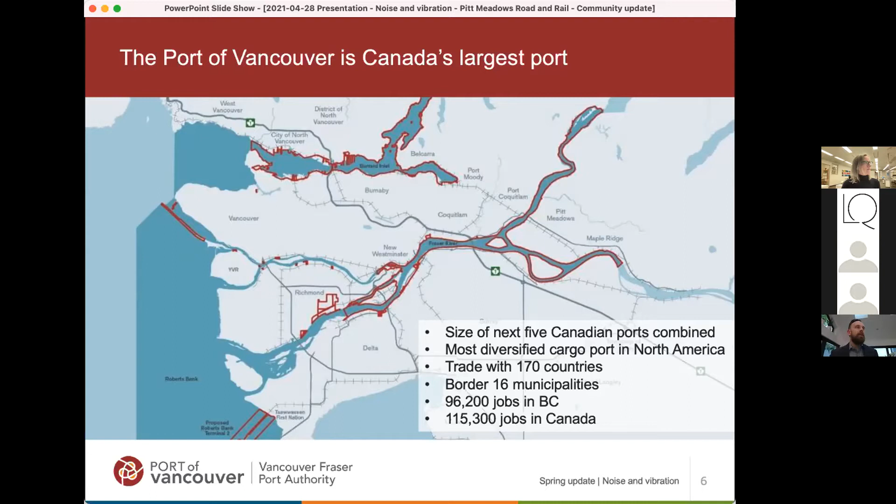Building off that background of who we are and what we oversee, I'd like to transition into what we see for the future. The Port Authority, in consultation with regional partners through the Gateway Transportation Collaboration Forum, has analysed historic trade movement data and trends and engaged with industry experts to assess likely national and global market conditions in the years ahead. With this information, we have identified a forecast of approximately 50% growth in trade volumes by 2030, compared to volumes measured in 2015, as shown in the image on this slide.

This 50% growth in trade corresponds to approximately the same year-on-year growth observed in the last 5 to 10 years. While subject to change due to items outside our control, the COVID pandemic being a good example, we are still confident in this growth projection. But keep in mind growth could be a bit slower, with these volumes reached a few years later than 2030, or it could be faster and reached before 2030.

Next slide, thanks. When you combine this trade growth with forecast population growth in the region, it highlights the critical importance of investing in infrastructure to ensure we can safely and efficiently manage this growth, to both meet our trade objectives and manage the impacts on local communities and our surrounding environment.

As an example of our need to build capacity, if we look at container trade for a moment, we know this segment has grown in recent years and continues to grow globally. In Canada, we use containers to export goods like grain and agricultural products, and import using containers for things like consumer goods. Given this, we see that Canada's West Coast ports face a capacity crunch by the mid-2020s.

Based on this forecast growth in trade, we are prioritizing infrastructure investment in Pitt Meadows to help respond to the existing and growing impacts of these trade movements to your community. The Pitt Meadows Road and Rail Improvements Project received funding through the Government of Canada, Canadian Pacific (CP), and the Port Authority to improve safety, efficiency, and capacity to move goods and people through the region and deliver significant national economic benefits and local community benefits.

The Pitt Meadows Road and Rail Improvements Project is made up of 3 connected but discrete components. 2 of these are being led by the Port Authority and are shown in orange: the Harris Road Underpass and the Kennedy Road Overpass. The third component, led by CP, consists of 2 parts and is shown in red: a new siding track as well as an extension of an existing lead track to the Vancouver Intermodal Facility.

Some of you may be wondering, what could happen if the community doesn't support, say, the Harris Road Underpass? Does that mean the rail changes won't happen? I'd like to provide you with some clarity. While the cliche of the whole being greater than the sum of the parts is certainly valid on this project, each component brings merits in its own right.

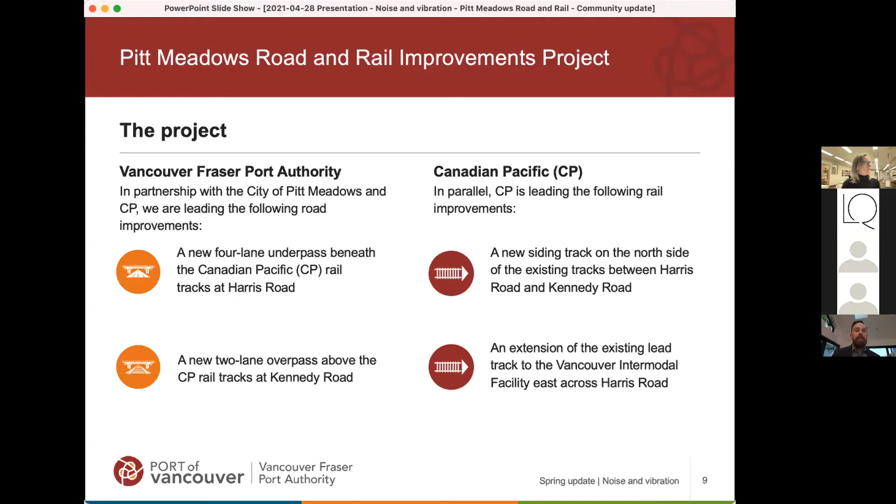Given the forecast significant trade growth, as well as CP's obligations to provide service in support of Canadian businesses and consumers while also operating in a safe and efficient manner, rail infrastructure investment along the Pitt Meadows corridor will likely happen in any future scenario. Given the proposed rail scope is wholly contained within CP's rail corridor, it is the Port Authority's understanding that CP can proceed with all, a portion, or a modified version of their component on their own. But it is also the Port Authority's assessment that the Pitt Meadows Road and Rail Improvements Project represents the most effective way to balance the interests of each partner and support a future which provides meaningful benefits to Canada, CP, and the Pitt Meadows community.

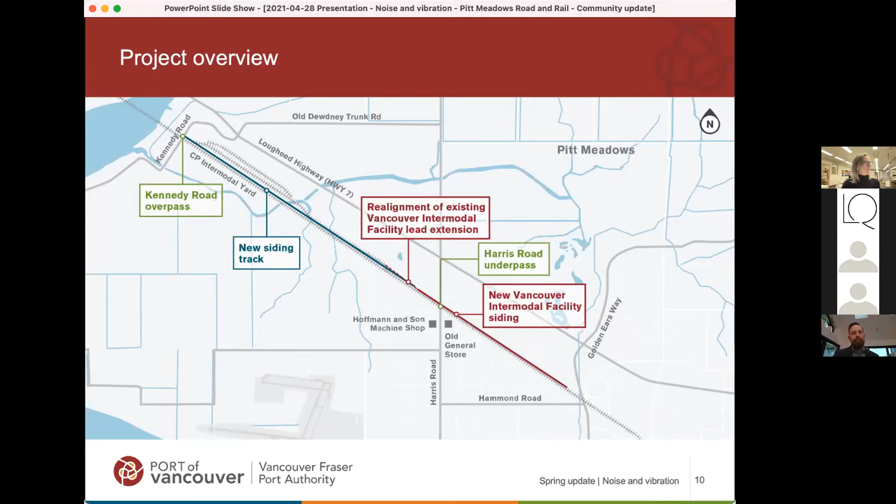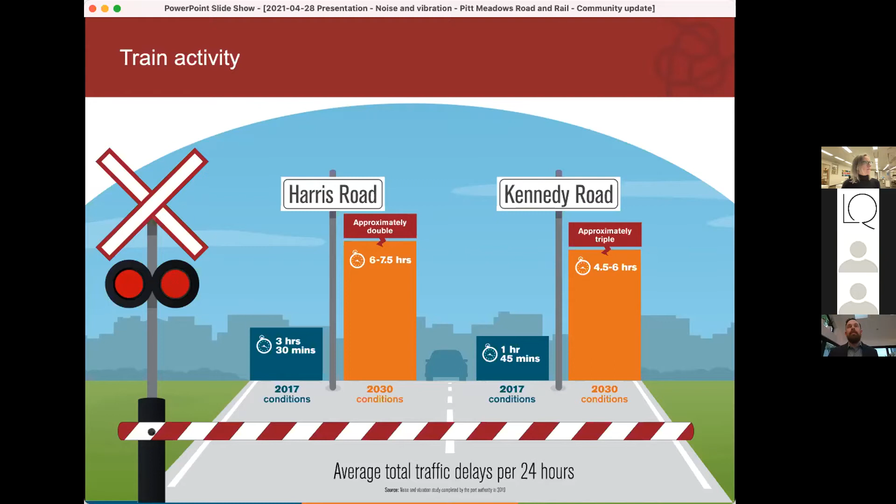This slide hopefully provides you with one of the key benefits to the community that this project is bringing. Based on the forecast growth, one of the reasons why we are prioritizing this project is to help respond to the existing and growing impacts of these trade movements to the Pitt Meadows community. As you can see on this image, the existing delays experienced by commuters at Harris and Kennedy are shown in blue. Our projections, shown in orange, indicate that by 2030, the delays at Harris will be roughly double what they are today and triple what they are today at Kennedy, in a scenario where the project is not constructed. Next slide, thanks.

We also see many more excellent opportunities that this project can bring to the community. That includes improving things like public safety, emergency response times, reliability for commuters, pedestrian and cyclist connections, and public spaces, while also reducing things like congestion and emissions.

My hope is that these last few slides help set some context of who we are as a Port Authority, what the project is, and some of the key benefits we see the project bringing to your community.

So in 2019, the Port Authority retained BKL, an acoustical engineering firm, to undertake a noise and vibration assessment. The assessment measured current levels and modeled future levels with and without the Pitt Meadows Road and Rail Improvements Project. This assessment was completed in line with Health Canada guidelines for noise and guidelines for vibration from the US Federal Transit Administration, which I'll refer to as the US FTA.

While we acknowledge it's currently noisy along the corridor, addressing pre-existing noise impacts caused by rail operations is not a core objective of the project. The focus of our project is to maximize our core objectives of ensuring the safe and efficient movement of people and goods by road and rail while identifying, analyzing, and mitigating impacts where warranted.

This approach is in line with other transportation projects of this scale recently completed and currently underway in the Lower Mainland. The Port Authority will work with CP and the City of Pitt Meadows to explore opportunities to maximize the benefits of the proposed warranted mitigation to address any existing issues where we can. But I want to re-emphasize that this project does not have a core objective of addressing pre-existing noise impacts.

The next couple of slides will give a brief snapshot of the technical lens as to how noise and vibration is measured. I'll flag that I'm about to go into a bit of detail here, but I hope it gives a good introduction to what noise and vibration is for the purposes of what we are looking at for our assessment.

Noise is measured in decibels, shown as dB, but there are sometimes different versions of decibels used. A-weighted decibels, or dBA, is often used when describing sound level recommendations for healthy listening. While the dB scale is based only on sound intensity, the dBA scale is based on intensity as well as how the human ear responds. Because of this, dBA gives us a better idea of how sound could impact your hearing.

Decibels are different from other familiar scales of measurement. While many standard measuring devices, such as rulers, are linear, the decibel scale is logarithmic. This kind of scale better represents how changes in sound intensity actually feel to our ears. For example, think of a sidewalk that is 80 meters long. If you extend the sidewalk by another 10 meters, so 12.5%, this would seem barely noticeable - this is a linear measurement. Using the logarithmic decibel scale, if a sound is 80 decibels and we add another 10 decibels, the sound will be 10 times more intense and will seem about twice as loud to our ears.

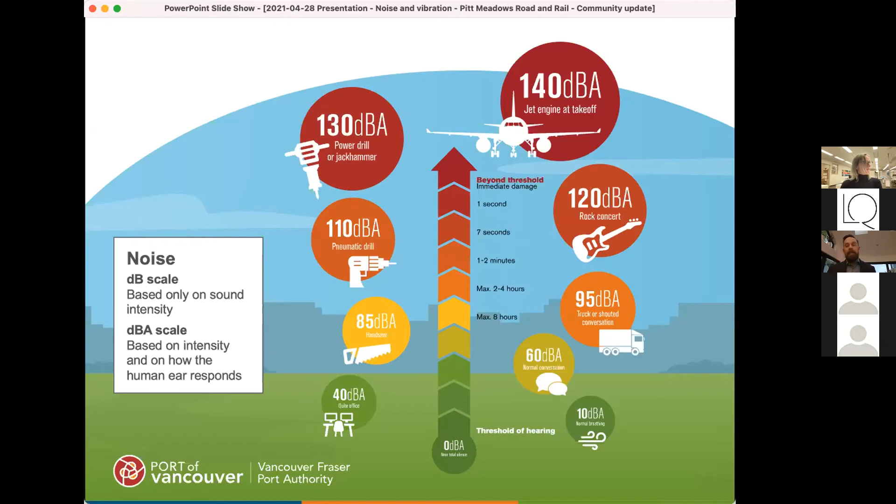The movements may be regular, such as the motion of a pendulum going back and forth, or more random, such as the movement of a tire on a gravel road, which is a little bit more sporadic. So when thinking about health effects of vibration, we measure the overall pressure waves generated by whatever is vibrating - it could be a piece of equipment or a structure. This is also known as vibration energy.

Vibration has two measurable quantities. Firstly, how far the object moves - this is also known as amplitude or intensity. Secondly, how fast the object moves, also known as frequency. This helps to determine its vibrational characteristics.

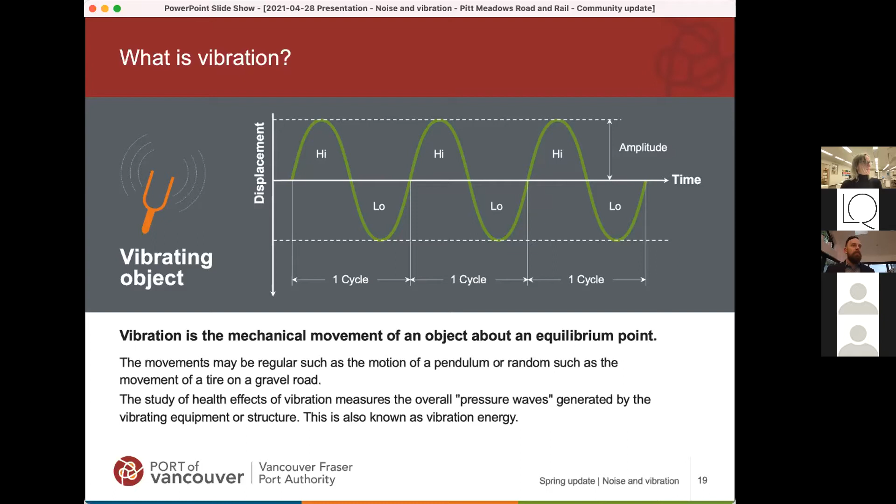I recognize the past couple of slides have been a bit technical in nature, but we have more background information on how we measure noise and vibration in the materials that we have uploaded to our project website.

Building off the background info, I'd now like to dive into the regulations and guidelines used in Canada when looking at noise and vibration on projects. As the lead on the project, the Port Authority's role is to ensure that potential noise and vibration impacts caused by the Pitt Meadows Road and Rail Improvements project are identified and analysed by independent experts, and to apply appropriate mitigation that is reflective of Health Canada's guidelines.

There are two important considerations to be mindful of when considering regulations and guidelines for noise and vibration.

Firstly, the Canadian Transportation Agency, or CTA, sets the regulations for noise and vibration caused by rail operation and also manages complaints and resolutions. Secondly, Health Canada establishes the guidelines and criteria for noise caused by new infrastructure projects, similar to the Pitt Meadows Road and Rail Improvements project. And there are guidelines established by the US FTA as applicable to vibration considerations on new projects.

The next few slides will go into a bit more detail of these regulations and criteria. One thing to note, though, is that we are providing this information for your awareness. If you have any specific queries or further clarification questions relating to these established regulations and guidelines, they are best referred to that particular regulator. We include these links in the materials we have uploaded to our project website.

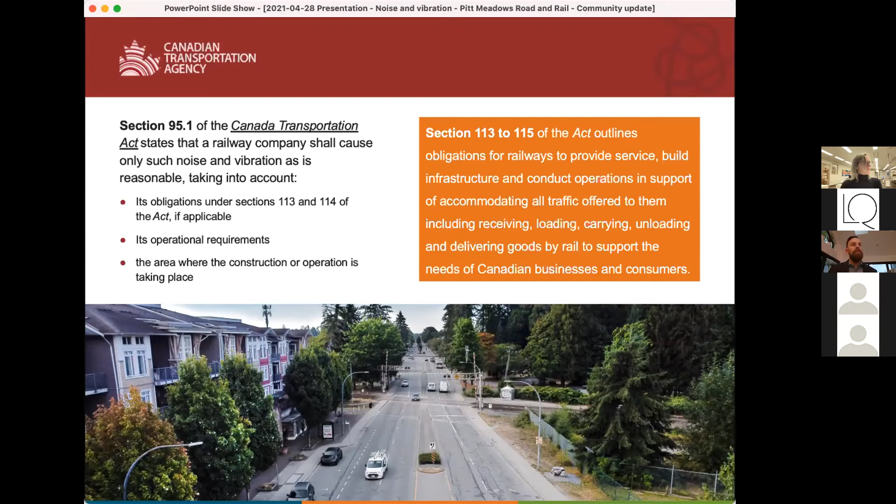This obligation is set by the Canada Transportation Act and requires that railways must provide service, build infrastructure, and conduct operations in support of accommodating and delivering goods by rail to support the needs as requested of Canadian businesses and consumers.

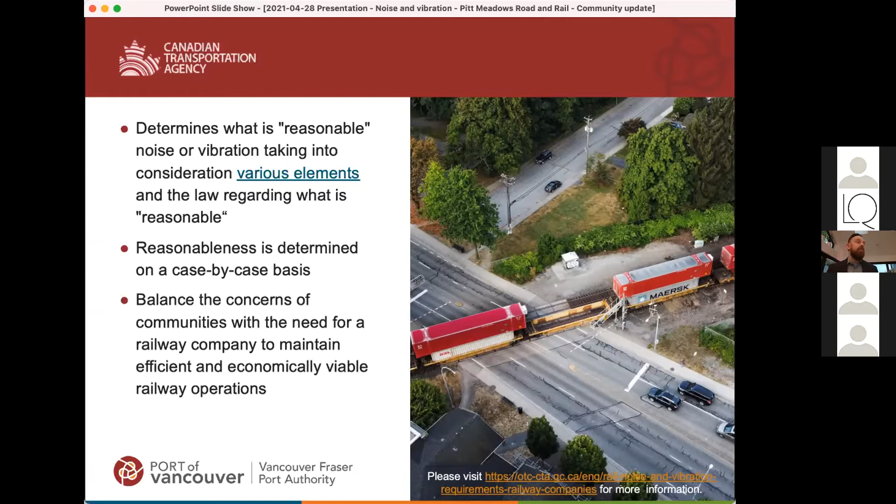In determining what is reasonable, the CTA will look at balancing the concerns of the communities with the need for a railway company to maintain efficient and economically viable railway operations on a case-by-case basis. The CTA has provided some information on their website as it relates to elements that they may consider in resolving any noise and vibration complaints with respect to reasonableness under Section 95.1 of the Canada Transportation Act.

To add further clarity and guidance, the CTA's Railway Noise Measurement and Reporting Methodology document was developed as a reference guideline for railway companies, residents, and municipalities for how the agency may specifically consider certain situations. I would encourage anyone with an interest on this topic to visit the CTA's website, and we have the website identified at the bottom right of this slide.

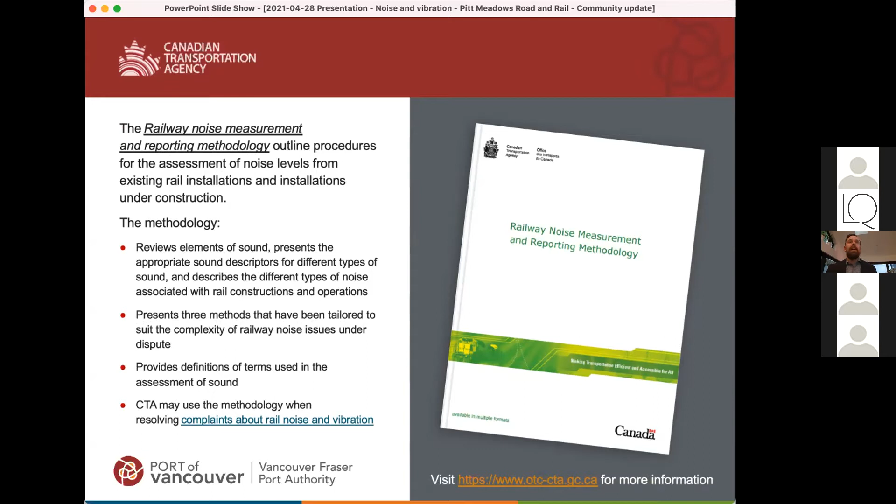However, our focus for this evening's session is on the proposed Pitt Meadows Road and Rail Improvements Project, and I will now walk you through the Health Canada and US FTA guidelines that apply given this is a new infrastructure project. With respect to noise considerations, Health Canada provides high-level guidance on identifying health risks related to noise anticipated from proposed major resource and infrastructure projects, again, similar to the Pitt Meadows Road and Rail Improvements Project.

The guidelines provide an overview of how to assess potential health impacts with respect to a change in noise associated with the project, including noise that disturbs your sleep. We refer to this as noise-induced sleep disturbance. Noise that may interfere when you're talking to someone, we refer to this as speech interference, and noise conditions that are perceived as simply being very annoying, we refer to this as high annoyance.

Health Canada does not have guidelines that relate to vibration, but per industry standards, we use guidelines from the US FTA to look at any changes in vibration levels from a proposed infrastructure project.

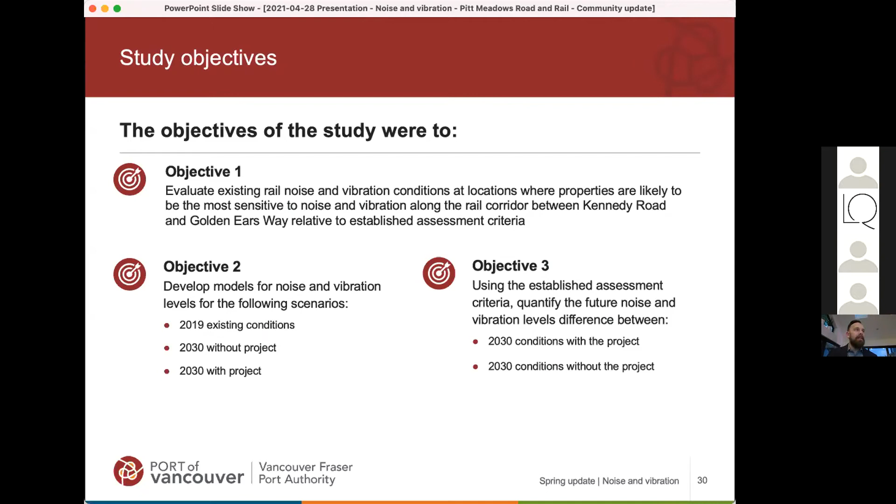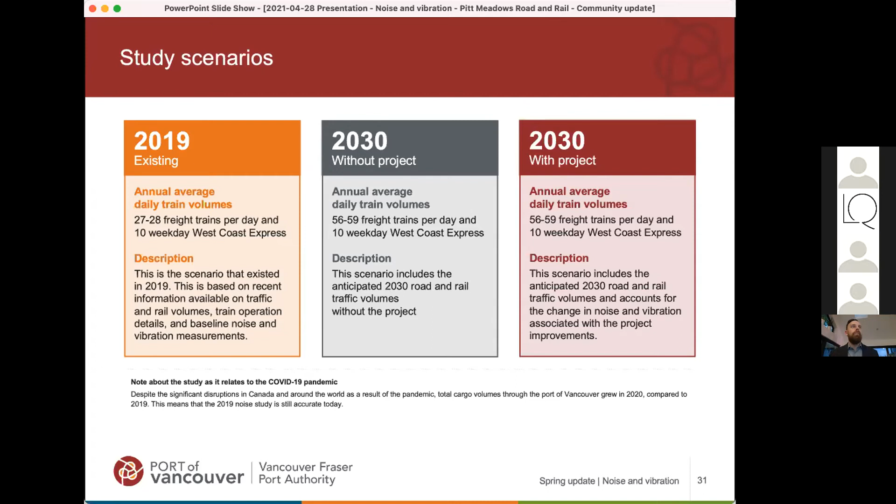Our study area and the scenario models for our noise and vibration assessment consider the rail corridor between Kennedy Road and Golden Ears Way. Between December 11 and 23, 2019, prior to the COVID-19 pandemic, 6 noise monitors were placed along the rail corridor between Kennedy Road and Golden Ears Way. These 6 locations are representative of the locations within the community where the noise impacts could be the greatest. 4 of these 6 locations also collected vibration data.

Health Canada does not discuss the number of monitoring locations required, but provides guidance on a number of approaches that can be used to estimate baseline noise. The methodology used for this study is reflective of best practice. During the time the data was collected, the monitors recorded data associated with rail and traffic movements 24 hours a day for 1 week. This map also includes a general illustration of any existing walls along the corridor, with the majority of these being around 2.4 meters high.

Some of you may be wondering, for the 6 noise monitors we identified, how was it decided that these were the best locations to collect that data? We can help provide clarity to this question. These monitoring locations were chosen to be at the residences that fronted the rail corridor and had clear line of sight to rail traffic. These locations are spread out along the corridor so that they can measure any difference in noise exposure at different segments along the corridor. This allows us to accurately calibrate our noise models for all households in our study area.

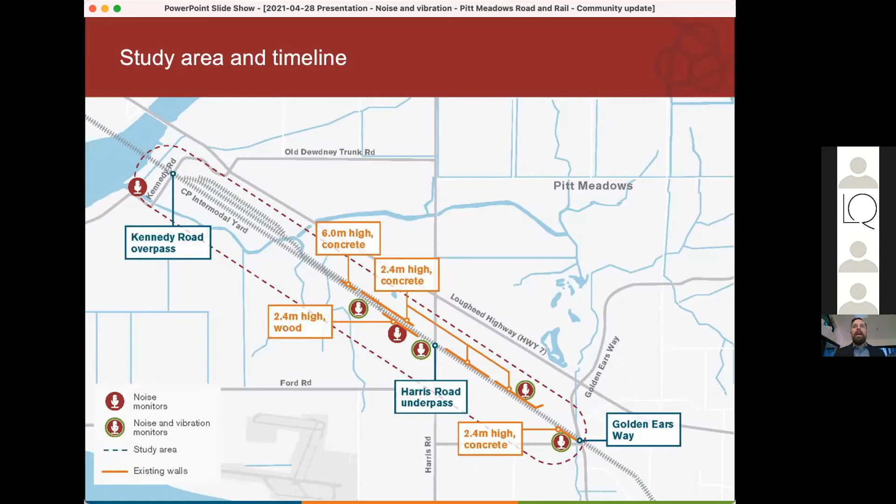You may also be wondering, why wasn't the study area expanded? The reason for this is that we selected the study area based on including land uses close to the rail corridor that could potentially have notable impacts based on the noise and vibration created by the Pitt Meadows Road and Rail Improvements Project. Given the suburban context of this rail corridor within Pitt Meadows, if you start to expand the study area further away from the rail corridor, we will start to notice interference between road-related noise caused from neighborhood streets and noise specifically attributed to rail.

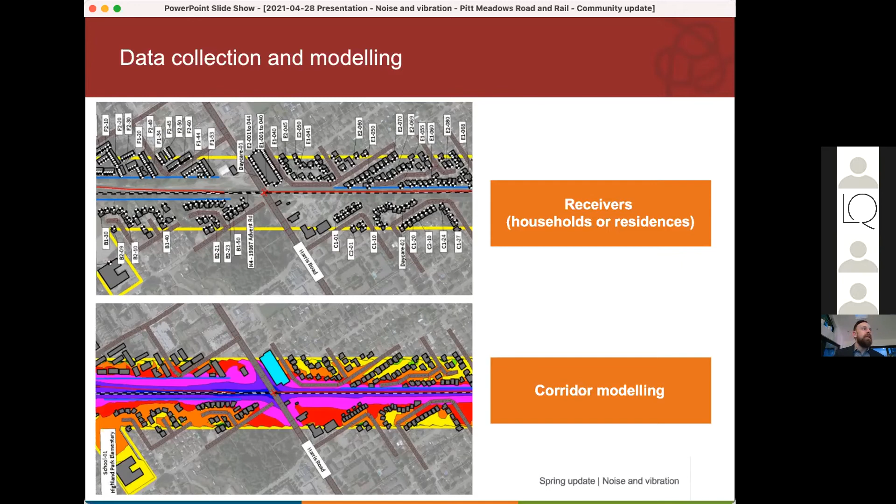In terms of the hierarchy for how we approached responding to potential impacts measured, we undertook the following in order. Firstly, we wanted to avoid or reduce the impact where possible. If you look at the noise and vibration baseline study uploaded to our website, you'll see reference to a consideration of a north-south option for CP scope. One reason this option is not proposed to proceed, with the north-north option proposed instead—as outlined in CP's presentations last week—is that the anticipated noise and vibration impacts were expected to be more. The option of the siding track and lead extension proposed by CP being on the north side of the main line actually reduces this impact and helps support this objective.

The second consideration is that we mitigate where avoidance is not possible, reflected in the upcoming slides where we identify new noise walls or replace existing walls with higher ones. The third consideration is to take a broader view where mitigation is not possible or not fully effective. We know the grade separations bring significant community benefit in terms of improved safety, better reliability for communities and emergency services, and more efficient movement of people and goods on your local roadways. Next slide, thanks.

I'd like to now share with you our findings from the baseline study. Here is the data from the assessment we undertook that gives an overview of existing conditions. BKL's study confirmed what we have heard from the community, that existing conditions are noisy. As you can see from the data on this table, several Health Canada criteria are exceeded for a number of residences along the corridor within our study area. Next slide, thanks.

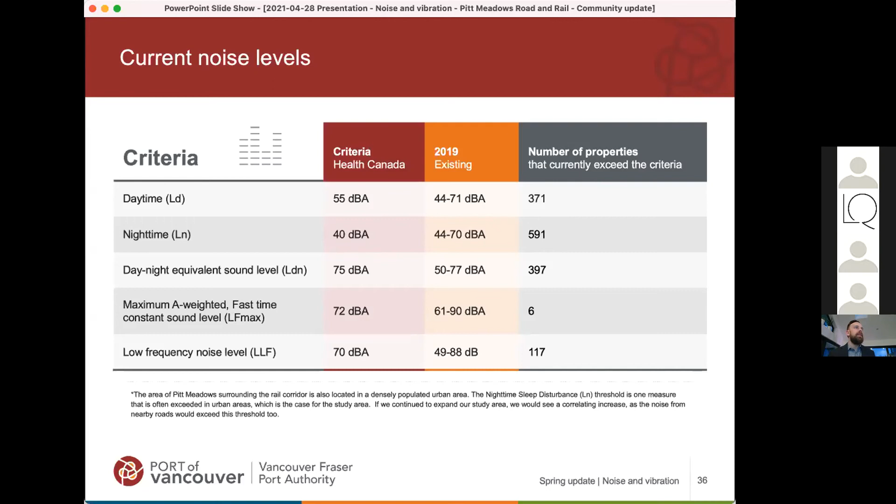Now looking forward to our future scenarios in 2030: with forecast trade growth, we anticipate that conditions may become noisier than they are today. Considering specifically the impacts of the Pitt Meadows Road and Rail Improvements Project in 2030, and separate from the projected trade growth—which, as we all know, will be happening regardless of the project—it is anticipated to increase these levels slightly.

On the next slide we again have more numbers to share, but first, the right side of this image gives a good snapshot of the key comparison between a 2030 scenario without the project and a 2030 scenario with the project. We see a 1 decibel increase at 35 properties along the rail corridor, a larger 2 decibel increase at 5 properties, and as an average, an increase of 0.1 decibels for all properties within the study area as a result of this project. These numbers are the anticipated future levels, but assume no mitigation is provided.

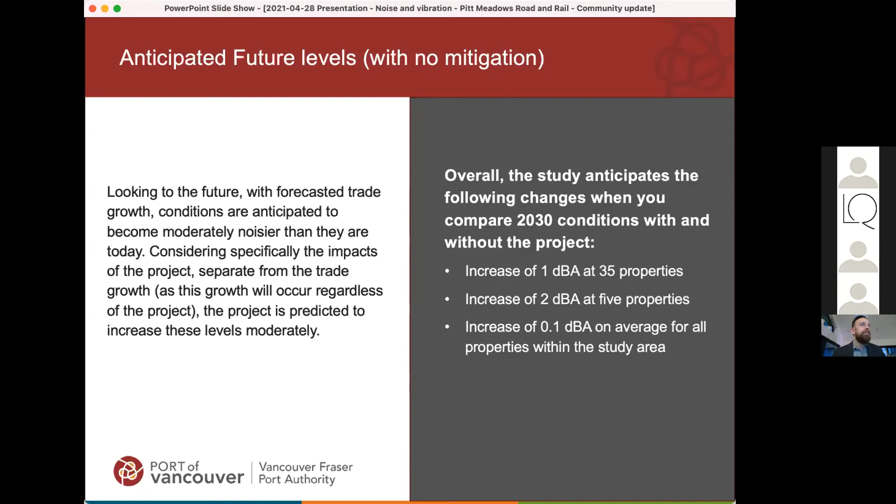However, this is not necessarily the case, as we will walk through shortly. Next slide, thanks. Before we look at mitigation, the next slide gives you an overview of the impacts the project could bring if mitigation measures were not considered.

Next slide, thanks. On this slide, the colored sections of the chart highlight the categories we're comparing to determine if mitigation is warranted, and if so, how much. The 2030 no-project column in the middle identifies the number of properties forecast to exceed the criteria in the future without the Pitt Meadows Road and Rail Improvements Project. The 2030 with-project column identifies the number of properties forecast to exceed the criteria with the project. As a reminder, any increase in the high annoyance category requires mitigation per Health Canada's guidelines.

When you compare the difference in the high annoyance category between the two 2030 scenarios, you will see that as a result of the proposed project, 9 properties require mitigation. There is one household located near Harris Road that was identified as exceeding the criteria for vibration. Per the guideline recommendations, we will undertake further technical work to identify any potential feasible options, such as resolving it through further design refinement of the project.

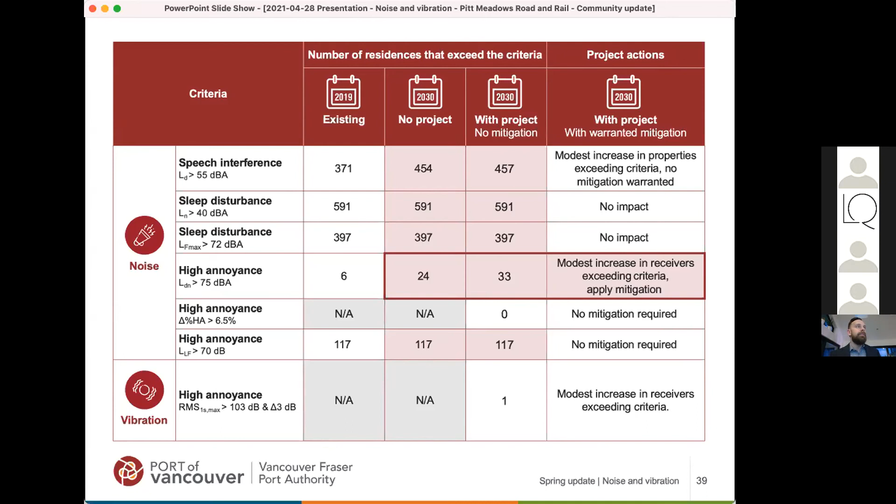Now I'd like to walk you through what we are considering for mitigation in response to what we have found. Based on the results of the noise and vibration study and Health Canada's guidelines, 9 properties will require mitigation to reduce noise associated with the project to levels below the high annoyance criteria. That's the one I walked you through that establishes a threshold of 75 decibels, indicated as LDN.

The extent of mitigation that responds to this criteria is shown on this image in green. The project is proposing to build approximately 245 meters of noise walls, 4 to 5 meters high, to meet those mitigation requirements. By applying this mitigation, these noise walls would also benefit 14 additional nearby properties. However, in addition to this minimum mitigation requirement as indicated by Health Canada's guidelines, the Port Authority is also proposing to go above and beyond the minimum warranted mitigation and construct an additional 365 meters of supplementary noise walls, expected to be 2.5 meters high. This is illustrated in blue on this image.

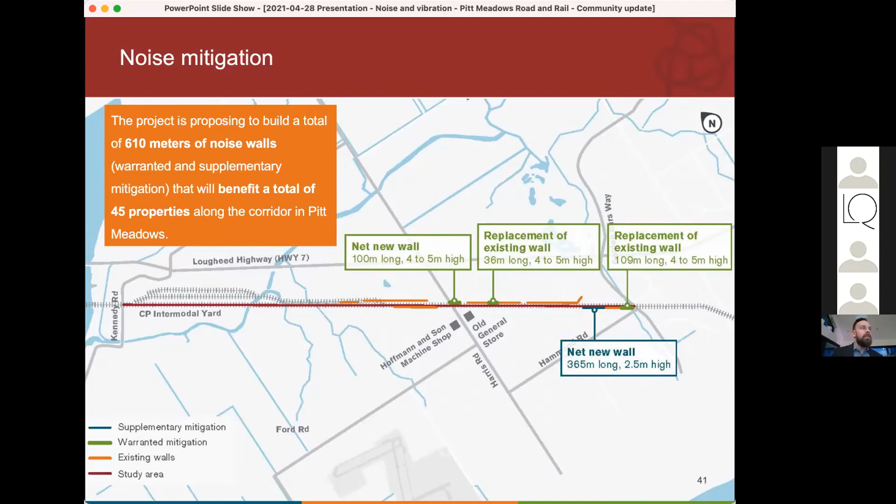This additional supplementary mitigation is predicted to reduce noise levels for another 22 properties and will reduce noise levels on average by roughly 6 decibels at these properties. One thing I did want to flag while we're on this image is that we noticed a typo in the materials that we uploaded to the project website on April 19th that relates to this image. This image here is correct, and the materials on our project website have been updated to reflect this.

Just to re-emphasize, this is the necessary mitigation that the Pitt Meadows Road and Rail Improvements project needs to provide in responding to the Health Canada guidelines. However, as shared on the previous slide, and in consideration of the importance to the community of addressing noise and vibration, the Port Authority is also proposing additional supplementary mitigation to further improve the conditions along the rail corridor. This is above and beyond what is recommended by Health Canada and was represented in blue on the previous slide.

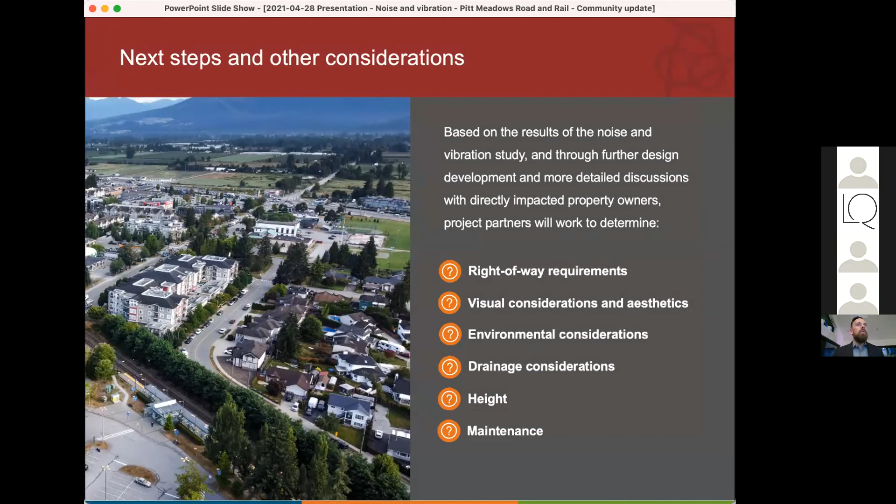We will also share further updates on the noise mitigation scope with the community in future project updates. Thank you for your time while I've walked you through quite a lot of content, some of it being quite technical in nature. But before I finish up and open up to questions, I did want to respond to a couple of questions we've heard from the community to provide some clarity.

So the first question revolves around why more isn't being done, given the feedback that the community is experiencing the entire corridor being noisy. There are many factors we've considered when determining the locations for noise mitigation. For the warranted mitigation, it was based on what our assessment identified in applying the Health Canada guidelines.

But for the additional supplementary mitigation, over and above what is required by the Health Canada guidelines, we looked at what would bring the most meaningful solution when considering the additional cost and what benefit would be received. Similar to other projects, we have to balance competing priorities against project partner objectives and affordability. Our goal on the Pitt Meadows Road and Rail Improvements project is to enable the safe and efficient movement of goods while reducing the impact to the community through improved safety, better access, and reduced wait times.

We believe the mitigation scope we have shared with you this evening demonstrates that we are not just meeting what industry standard processes are telling us, but that we are also exceeding these to bring more enhancement to the community where we can, in balancing various project priorities.

The second question relates to how we've illustrated the existing walls on our maps. For our baseline assessment, we relied on aerial imagery and general site observations to provide an indication of the existing walls along the rail corridor. We consider this industry standard practice, where on-site access may be difficult, such as requiring permissions from hundreds of residents, where there may be safety risks, such as large moving trains nearby, or where we are simply trying to reduce exposure of the project team, such as during a pandemic.